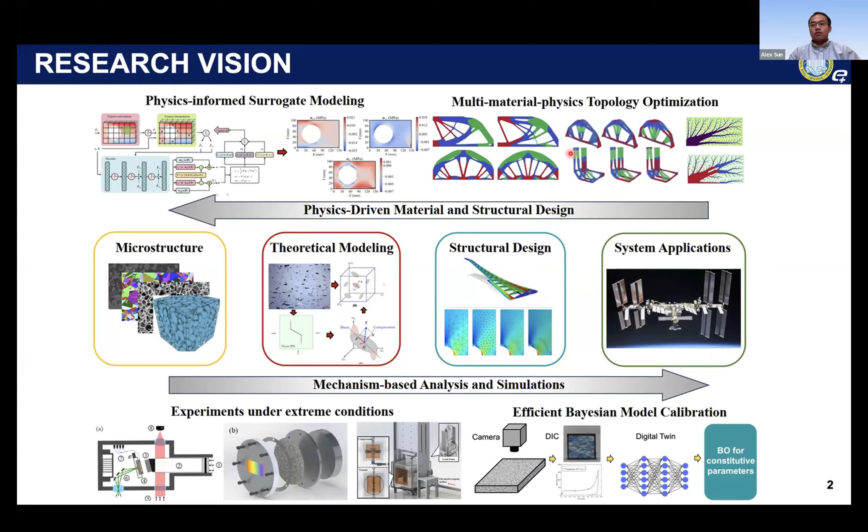Our Gaussian process uses a neural network as the mean function, which is very powerful to model quite complex stress localizations, for example. Furthermore, I will extend this compliance minimization framework to more advanced topics such as multi-material and multi-physics topology optimization.

In that extended framework, we will handle both the self-adjoint problem and the non-self-adjoint problem. Finally, I will demonstrate our capability using a multi-physics example, such as thermomechanical device design.

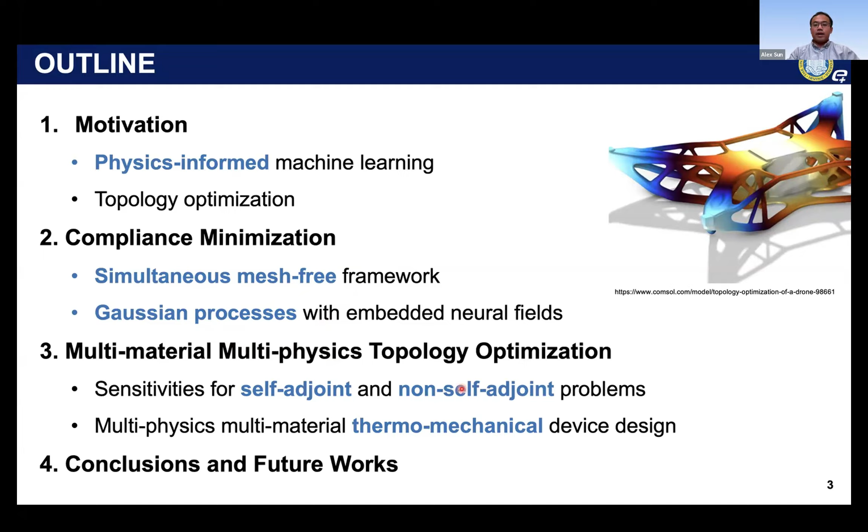Machine learning is a set of powerful tools for modeling complex systems. Depending on the availability of data, machine learning can be a data-driven approach, or it can involve no data or very little data. In that no-data case, we call it physics-informed machine learning.

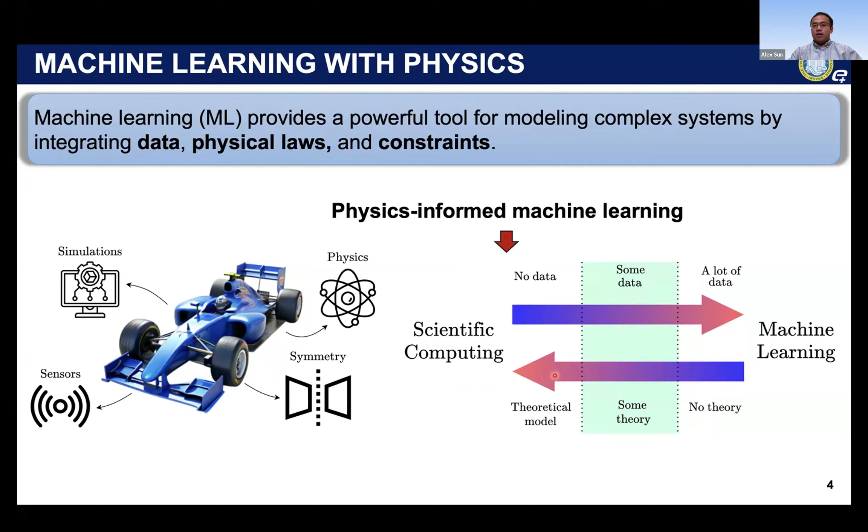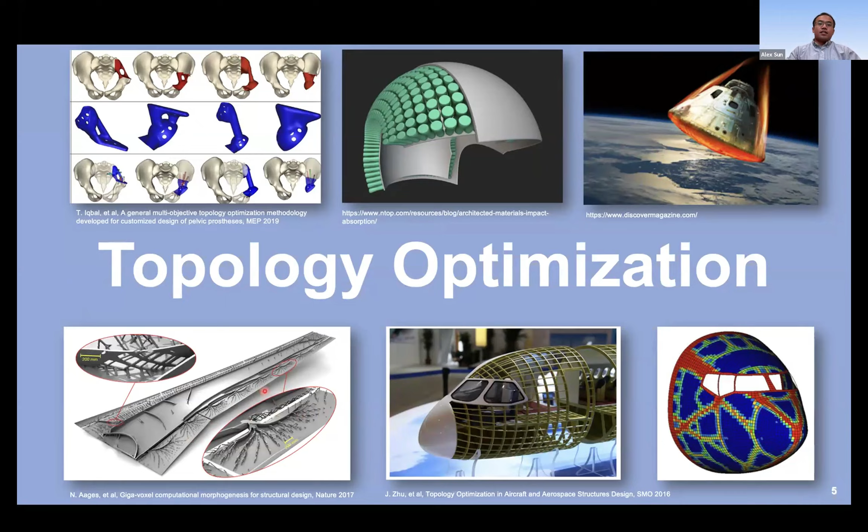It's just like a scientific computing technique, such as the finite element method, where we can model a complex physics system or get solutions to complex governing PDEs. Topology optimization is a good topic at the intersection of computational mechanics, machine learning, and design. It draws significant attention in engineering design applications, such as aircraft design and helmet design for protection purposes. Topology optimization is a method to determine material distribution by minimizing specific objective functions.

So those optimizations are under the constraint by several physics, for example, by the PDE constraints and also the constraints from the volume fraction. Classic methods such as solid isotropic material with penalization has been pretty much well developed, right?

So this simple method uses a design variable of the density, ranging from 0 and 1, with 0 corresponding to the void and 1 corresponding to the solid.

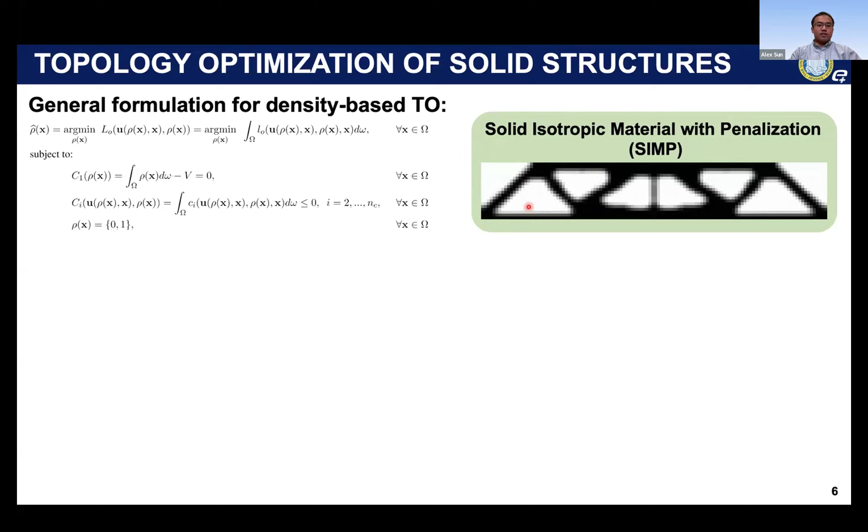This method has been very well developed in recent years, and there are some advanced topics around multi-scale, multi-material, and multi-physics. Most recently, people use nonlinear material constitutive response, such as plasticity, to do topology optimizations.

However, there are very limited amounts of work that explore machine learning's application in these advanced topics. Today, I will be focusing on multi-material and multi-physics as the advanced TO problems.

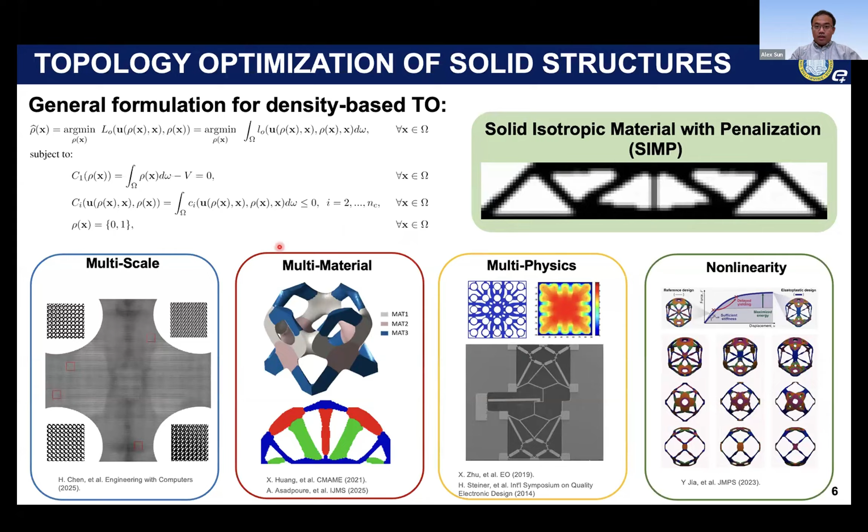However, machine learning has already been quite used in the topology optimization regime. So this work presents a supervised approach, where they train a neural network to predict the sensitivity map. This supervised approach can accelerate the compliance minimization by 11 times for very large scale problems, like 10.6 million elements.

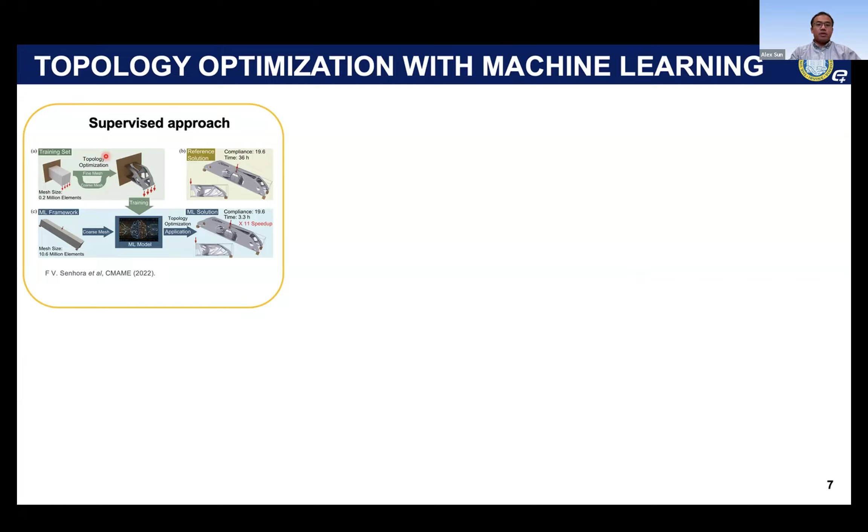So if we do not have data, we can use physics-informed machine learning for topology optimization. Those four papers combine physics-informed machine learning with finite elements, and also combine machine learning with a deep energy method to do TO.

However, all those approaches have a similar algorithm structure where for each density update, you have to solve for the displacement, or solve for the solution variable. We call this a nested structure, and it can cause pretty high computational costs, especially using machine learning or physics-informed machine learning solvers to get the solution variables.

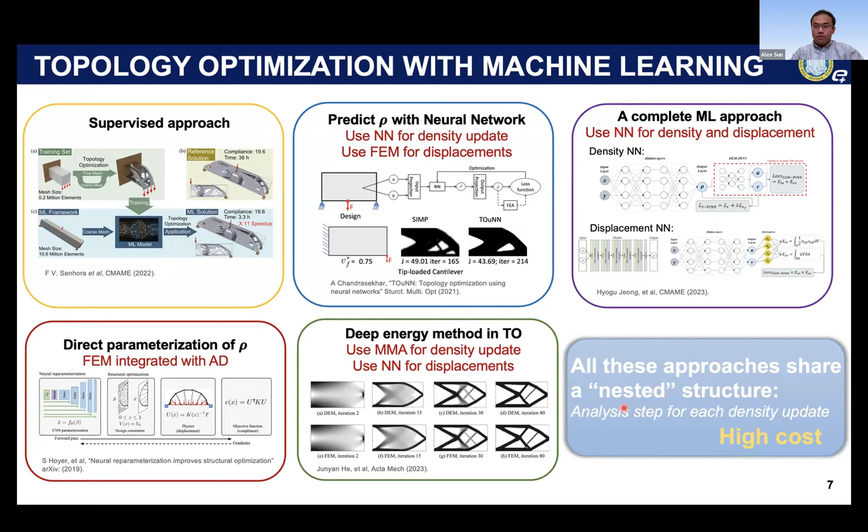So as I just mentioned, the existing machine learning methods for TO have many issues. It can be very expensive to compute, and it has very slow convergence to satisfy balance conditions. Also, at the beginning of the training, the accuracy is pretty low.

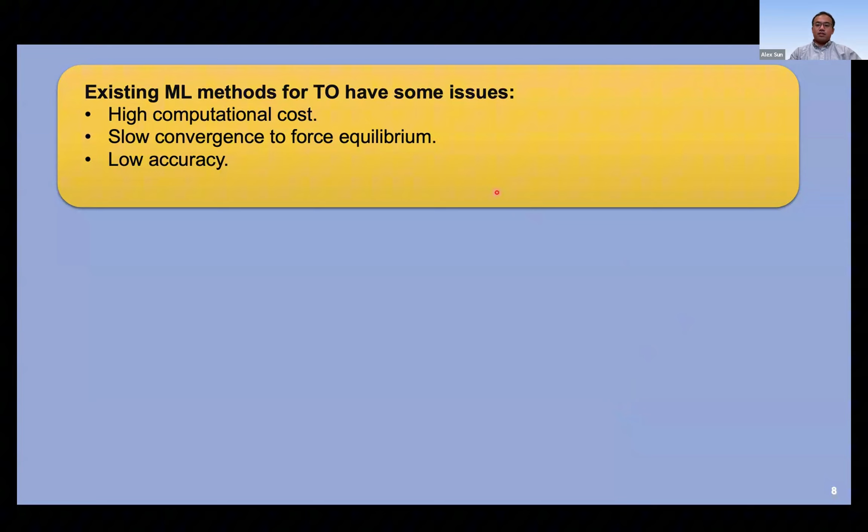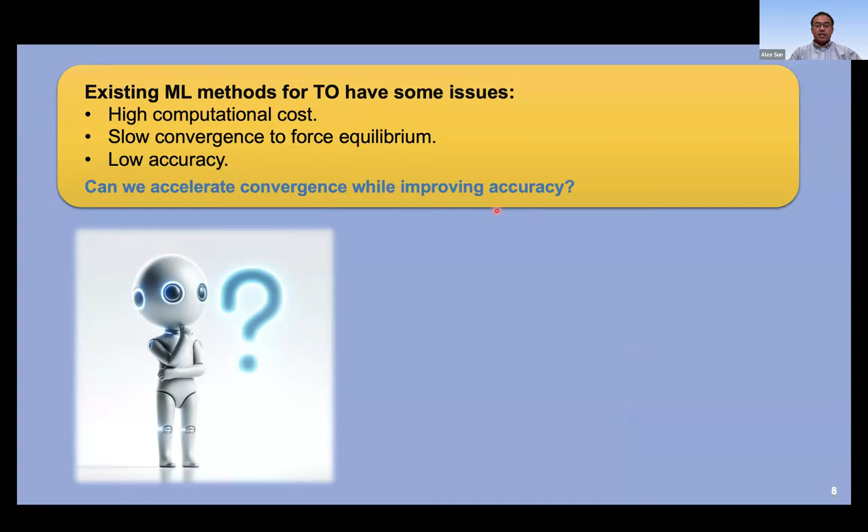Because we are minimizing the residual of our PDE system, and also minimizing the boundary conditions, which may not be satisfied. So one question we can ask is, can we accelerate the convergence while also keeping high accuracy? Yes, the answer is yes.

And I'm going to show you how we do compliance minimization, which is the benchmark TO problem, through our framework called the physics-informed Gaussian process.

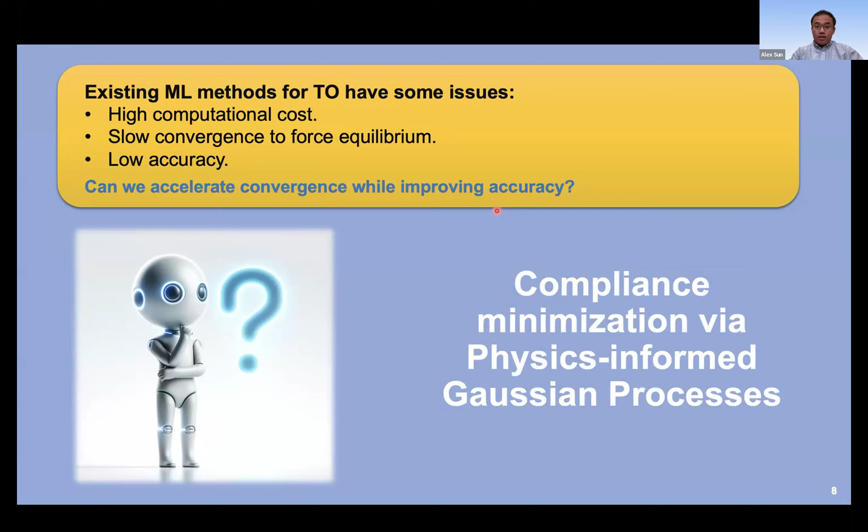This slide shows the general comparison of our approach with the classic TO approach, such as SIMP. Our approach is a simultaneous and mesh-free approach, where by simultaneous, I mean we optimize the topology, such as updating the density field, simultaneously with solving for the state variable.

Here is a comparison. For a classic SIMP method, you can see we solve for the displacement, or solve for the solutions, iteratively for each density update. What we believe is that this nested solution step is unnecessary.

What we do is for each iteration step, we keep updating the density and also the displacement simultaneously. So this is a simultaneous scheme, which is just like the continuation nature in classic TO problems.

In order to achieve the simultaneous approach, we have to parameterize our density, which is the design variable, and also the solution variable, continuously with an analytical function. That function we use is a Gaussian process for each variable, which I will talk about later.

With this continuous representation, what we can achieve is we do not really need the filter to solve checkerboard issues, and also we can achieve super resolutions. So there are many advantages to using a continuous representation of our variables.

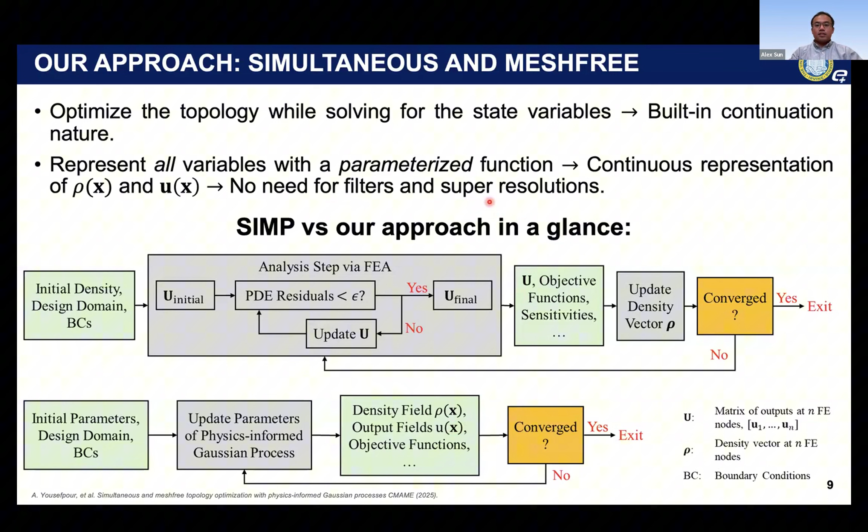Okay, so this is our overall algorithm. In order to do topology optimization, we place Gaussian process priors on all variables. The specific formulations of the Gaussian process prior will be given after these slides.

And then we can formulate the general topology optimization problem by this objective function, which is an integration of a local function. You can think about this as compliance minimization, where here L0 represents the local compliance value.

This objective function should be subject to several sets of constraints. C1 represents the volume fraction constraints. Ci represents design constraints—for example, if you want to put a hole in your design domain, it's constrained by the Ci constraint. R represents the residual constraint, where we have both the governing physics residual, the PDE residual, and also the residual from the boundary conditions.

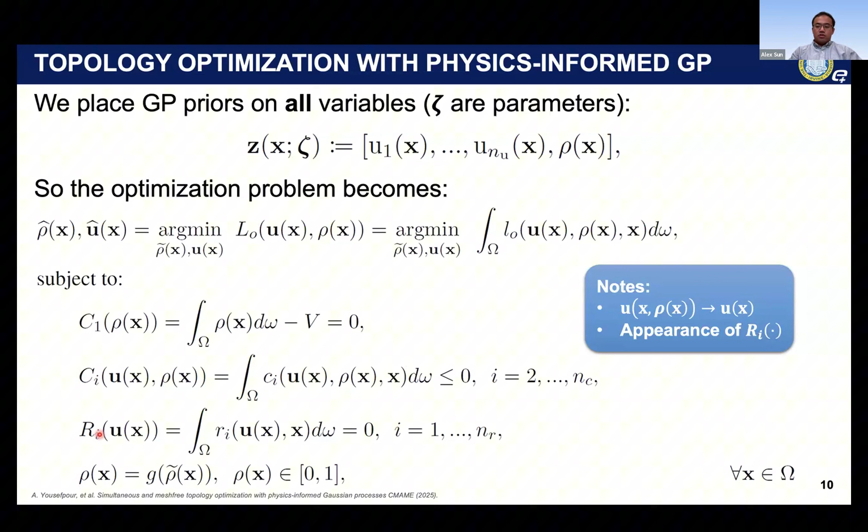So we can use a penalty method to transform the constrained optimization into unconstrained optimization by introducing these weight factors. With this continuous representation and unconstrained optimization, we can solve this problem by estimating the parameters to minimize this total objective function.

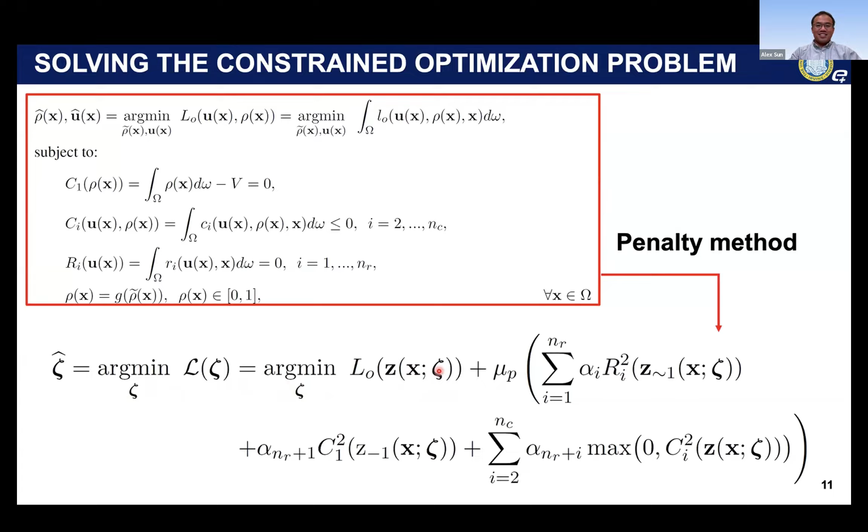As I mentioned earlier, we place the GP priors on all the solution and design variables. So why do we really need the GP priors? Well, the GP can provide a very powerful and probabilistic way for data emulation and also for function learning.

For data emulation, GP leverages the data from the field. For example, if we want to learn the function of the displacement, it's a continuous function. The data for that function is boundary conditions around points close to the boundary where we know the values. For example, if we fix a point on one of the edges, the displacement will be 0.

Then we assume Gaussian priors on this, we place the Gaussian prior on the displacement function, where it has a mean function m and also a covariance function. Both the mean and covariance have their own parameters, theta and phi. The covariance function we adopt here is Gaussian type, where this exponential function captures the correlation between two points in the design domain, and this correlation is regularized by a length scale parameter phi. We also introduce this nugget parameter as an actual term to stabilize the training of the Gaussian process.

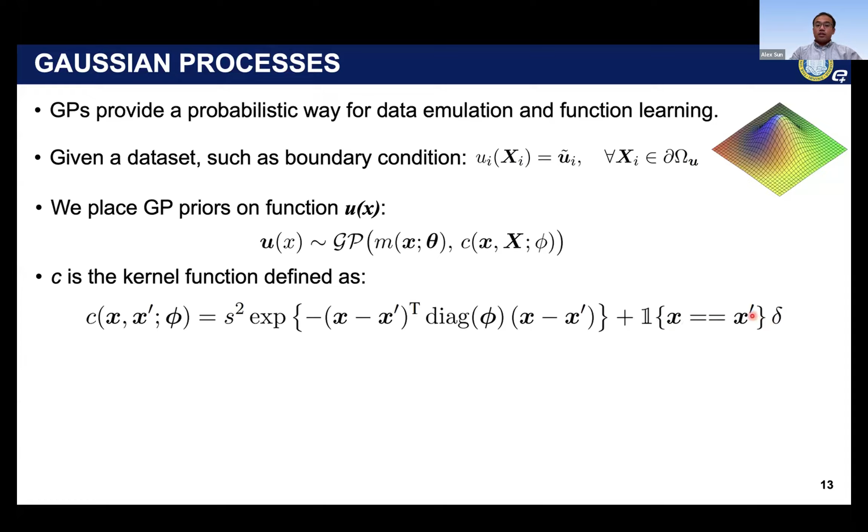Now that we have defined our Gaussian process, we can estimate our function values at any given point in the design domain using these prediction formulations. Here we want to predict the displacement field, the ith displacement component at point x star, equal to the mean function plus a correction term. The correction term contains two components: V, a weight matrix which contains the inverse of the covariance matrix, and R, the residual term.

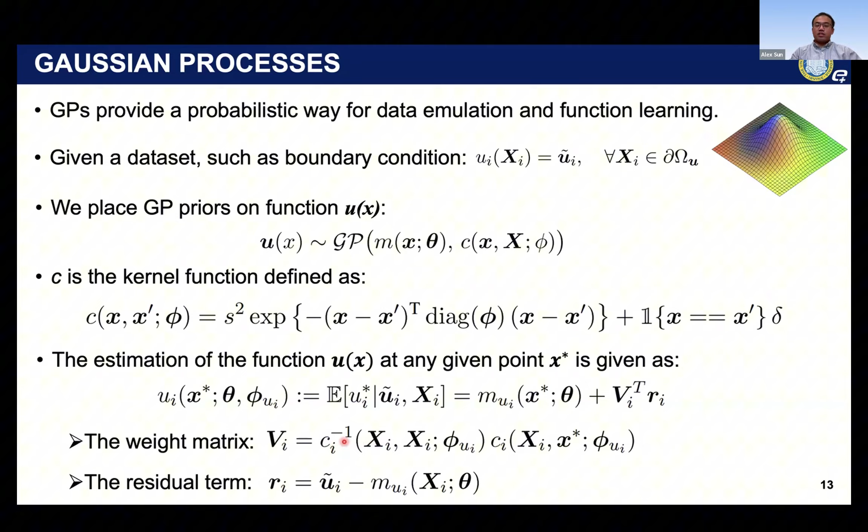You can easily verify that by choosing x star equal to the boundary point x, the prediction reproduces the boundary condition data. This reproducibility is very useful to capture boundary conditions without using residual terms in our physics-informed machine learning framework. We also introduce the nugget parameter so that when we invert the covariance matrix, invertibility is always satisfied and the matrix is always positive definite.

Now we have defined the Gaussian process. We've only described the covariance function, but for the mean function, what we use is a neural network. We place a neural network, such as a multi-layer perceptron, as the mean function.

Then we can further construct our physics-informed loss based on the PDE system, and update the parameters in the neural network to minimize this PDE loss so that we satisfy the physics. Our approach is mesh-free because we use collocation points in the design domain as input to the neural network, and output the solution variables at those collocation points.

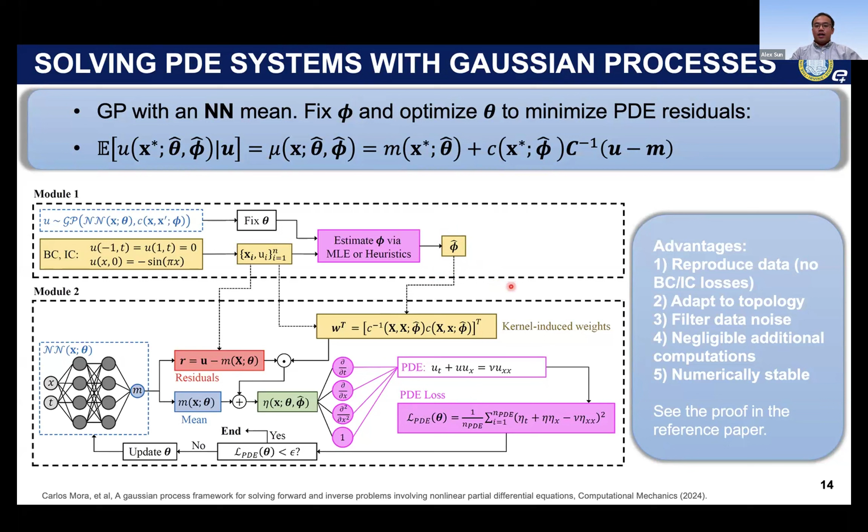During training of our neural network, we do not change the kernel parameter phi, because we already fix and choose that parameter before training. This significantly increases computational stability and decreases computational cost. This choice does not influence the accuracy of the PDE solutions from this method. If you're interested, you can read our paper for more details.

I'm going to show you the capability of this physics-informed Gaussian process by solving three different PDEs: Burger's equation, an elliptic equation, and another type of PDE system. We compare our framework with conventional PINN, and found that the absolute error is much smaller than the traditional physics-informed neural network, so it's much better in terms of accuracy. The reason is that we don't have a residual term for boundary conditions—all we focus on is minimizing the PDE residual, so it can be quite efficient.

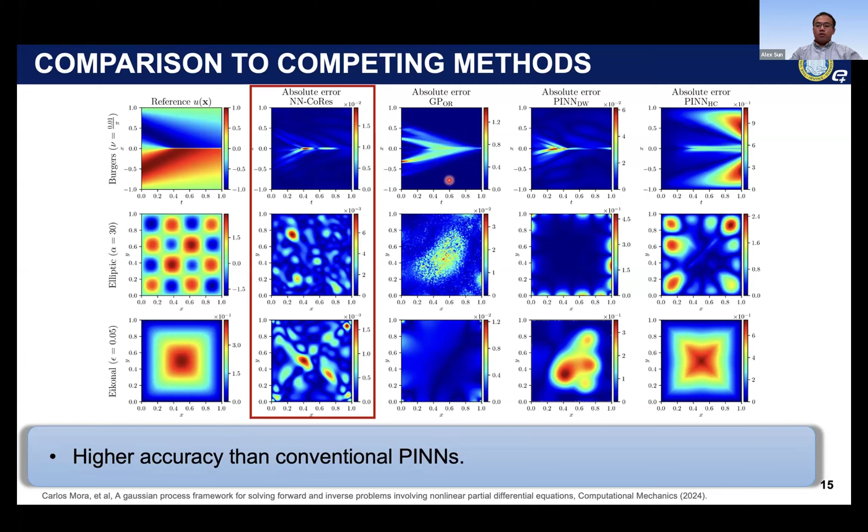Now we can solve the PDEs, and what we want is to really use this physics-informed Gaussian process to do topology optimization. However, a multi-layer perceptron neural network cannot really do the job because it has issues such as spectral bias, where it cannot capture high gradients in our solutions.

To better parameterize the mean functions, what we choose is PGCAN as our mean function. PGCAN has 3 major components: feature convolution based on the 2D convolution neural network, where we define a feature space in the design domain. The feature space has a parameter called the res parameter, which quantifies the resolution of the grid in the design domain.

We can adapt the res parameter to adapt the topologies, which I will show you later. After the convolution, we interpolate the convolved feature onto the interpolation point, or collocation point, to estimate our loss functions. This interpolated feature will pass through the decoder to get the output of the mean function.

Similarly, we condition this output of the mean function with GP formulation to get actual physical terms, such as displacement and design variable. Based on those actual physics displacement and design variable, we can construct our physics-informed loss.

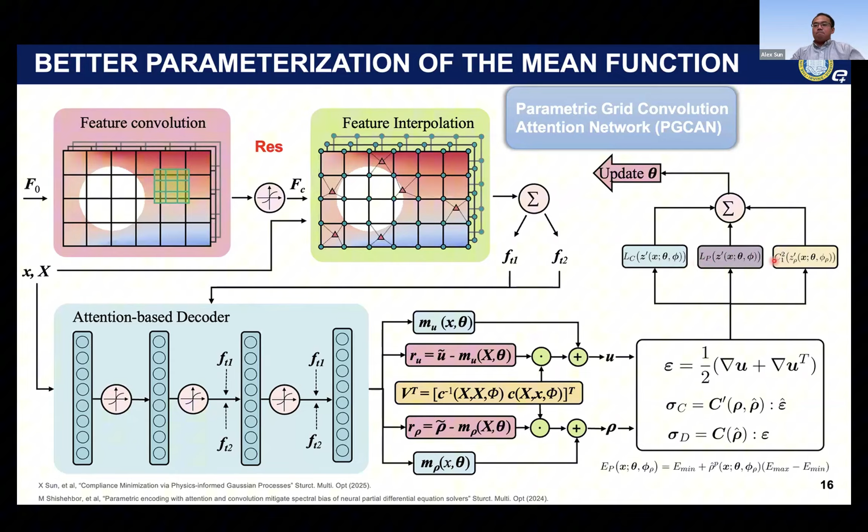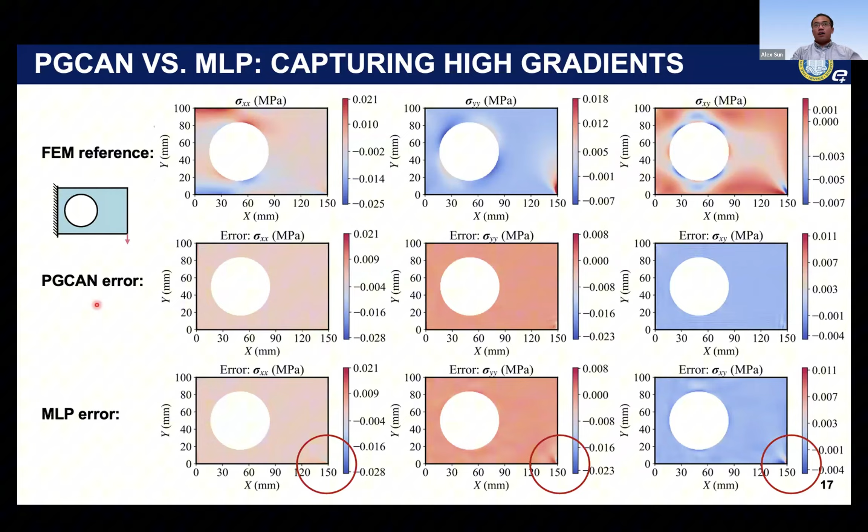In literature, people use modified neural networks such as Siren to achieve similar results, but I believe our PGCAN method is much better. We can get this convergence done in about 200 or 300 iterations.

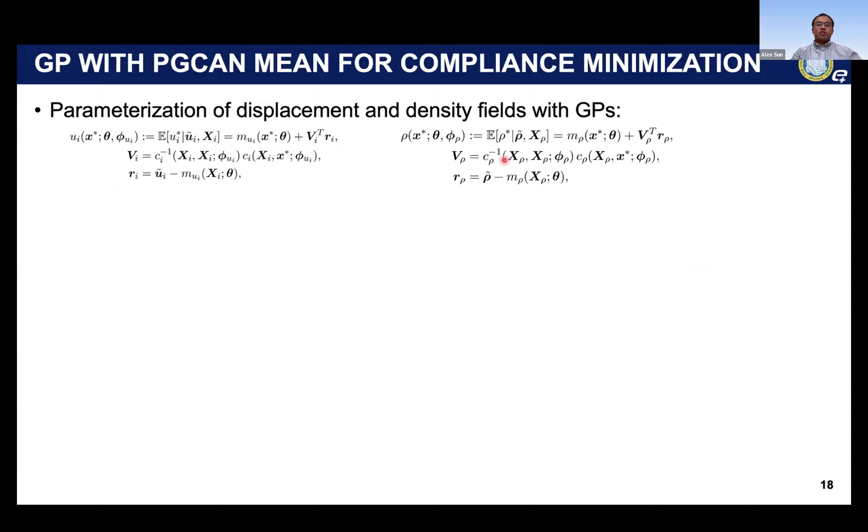Here's the summary of my framework, where we place the GP priors for both the displacement and the density. Those are the formulations. We have independent GPs for each variable, so that we can make sure our computational cost is low with independent GP. And we have three different loss components.

We use a penalty method to transform the constrained optimization into unconstrained ones. What we do is just optimize the parameters for the neural network to minimize this objective function so that we can solve this TO problem.

In order to effectively and efficiently estimate the loss function, we can use automatic differentiation method to get the gradient, because we have the stress and strain in our loss functions, which is a gradient of the displacement. However, automatic differentiation can be very expensive.

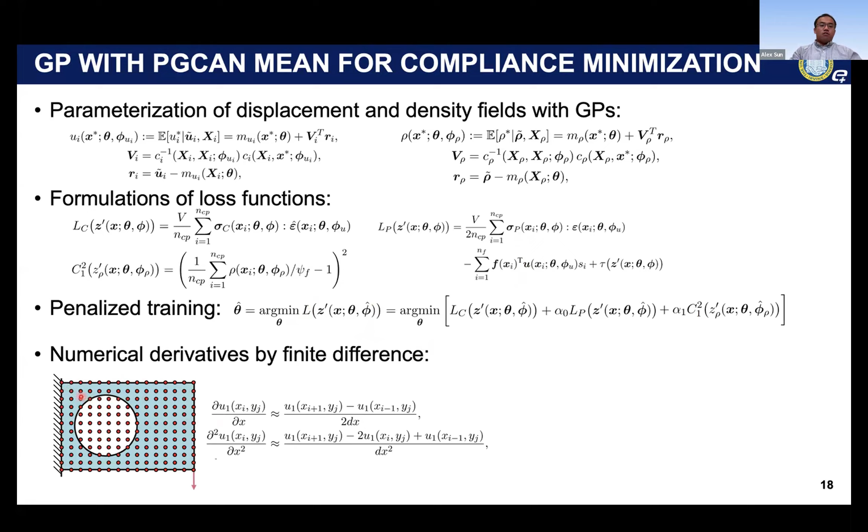What we use here is a finite difference method, where we place a structured grid of collocation points in the design domain, and the numerical gradient can be easily estimated.

Also, to further stabilize our training process, we designed a curriculum training scheme where instead of directly targeting a very low volume fraction target, we gradually schedule our learning from a high volume fraction down to the target value. This significantly improves the stability of our training.

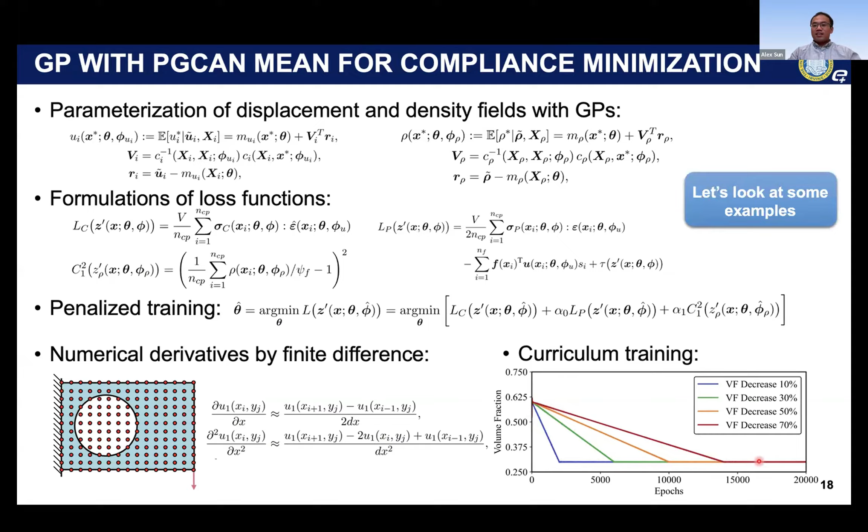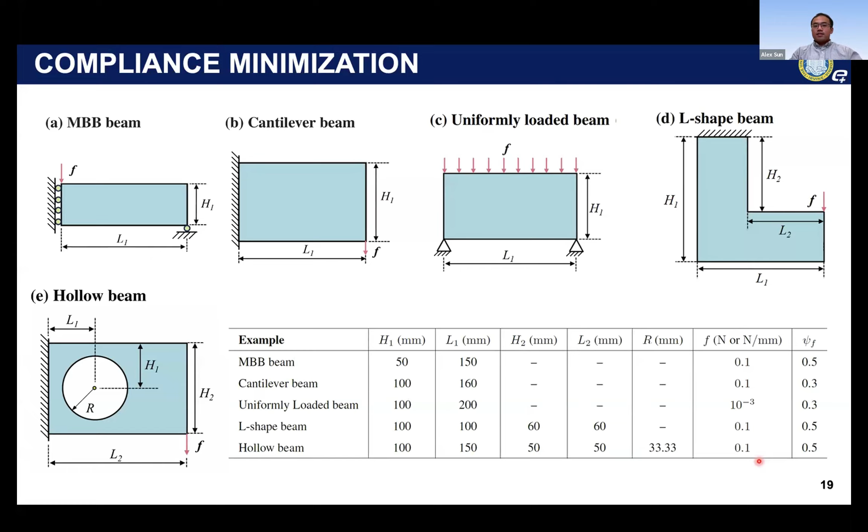Now that I've introduced the framework, let's look at some examples. I will use 5 different benchmark examples. These examples are widely available, and you can see them everywhere in educational papers for TO.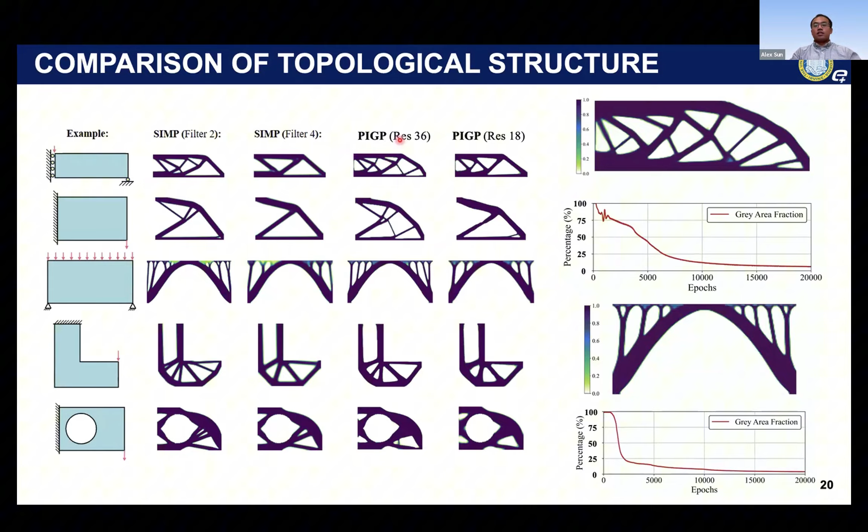So what does the complexity mean? The complexity we defined here is how much features in the design domain. For example, in this MBB example, the green pixel represents the interface between the solid and the void. So we define the complexity as a ratio of the green pixel over the solid pixel. The higher the ratio, the more complex the structure.

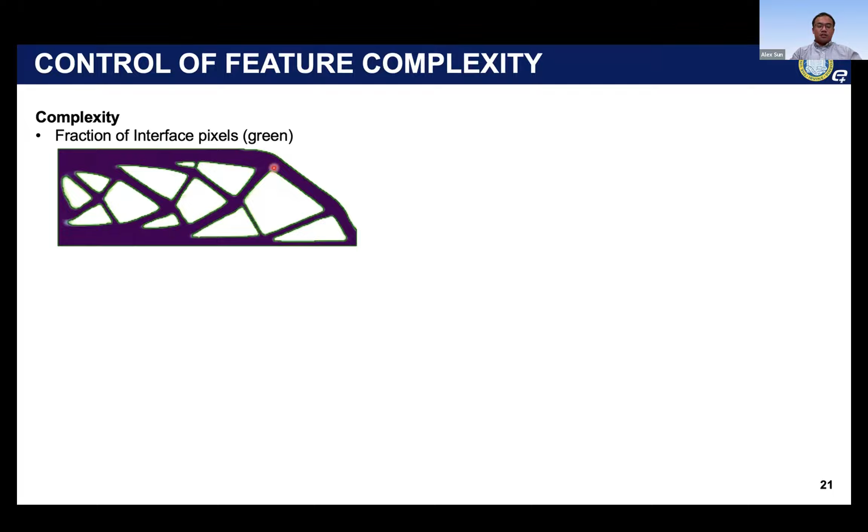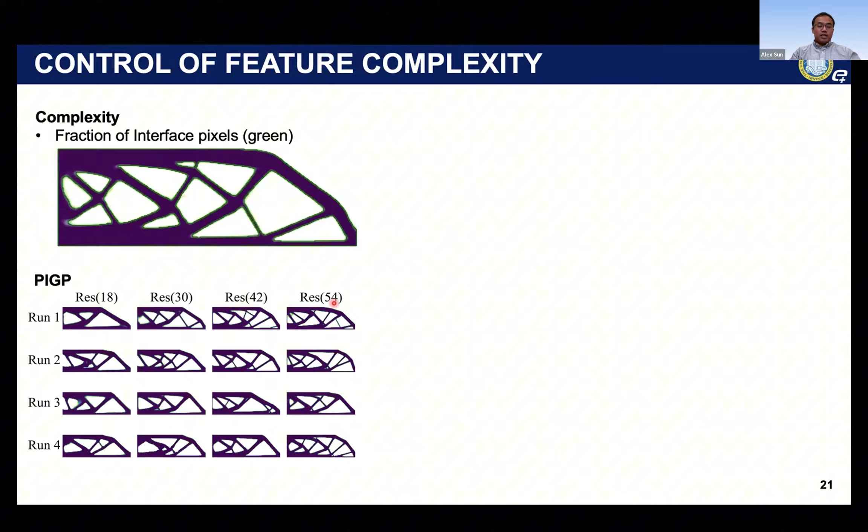This figure shows our approach where we can increase the Res parameter from 18 to 54. The Res parameter defines the resolution of our PGCAN grid. By increasing the Res parameter, we can increase the complexity, which is also represented by this statistical curve, static bar plots. However, you can also see from the plot that our approach has a pretty wide distribution of this complexity metric.

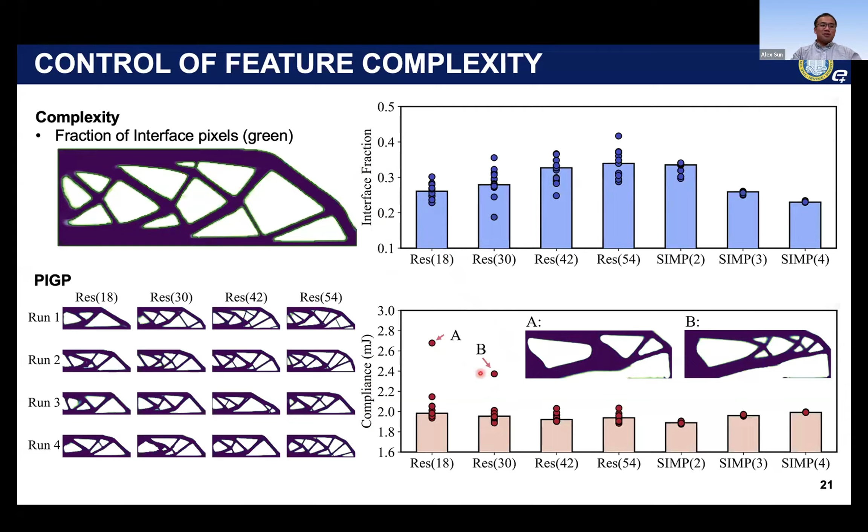This is because even with a curriculum training schedule, we still get some instability happening during our training for some initializations. We repeat our simulations or training for 10 different initializations, and for several of them, we see these outliers on the compliance as well as some outliers in the interface fraction. Those outlier cases correspond to less preferable design structures, with very high objective functions. This is due to the instabilities, and we will solve this issue later using the shape functions, which I will mention in the next slide.

We can also compare the topologies from using the MLP as a mean function versus the PGCAN as a mean function. You can see the PGCAN can be very effective in removing the gray area and getting nice structure binary distributions.

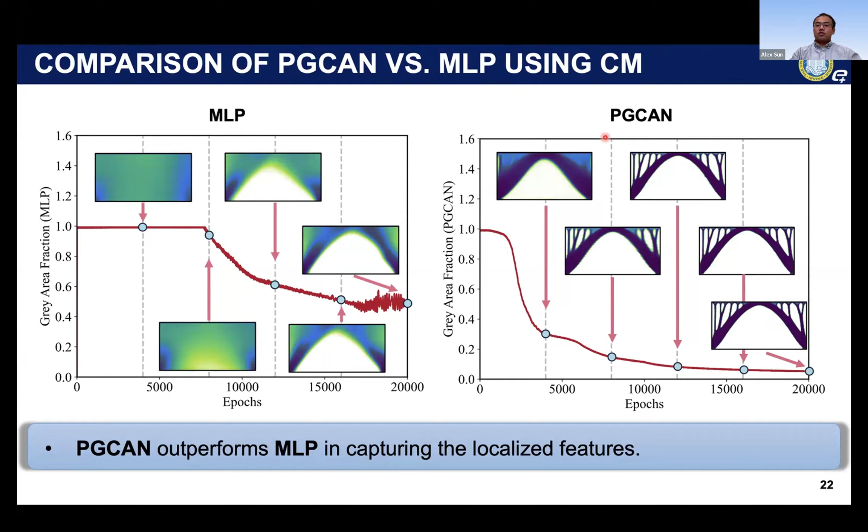We can also use our physics-informed Gaussian process approach for fluid flow optimization. Here we are trying to minimize the energy dissipation by defining this function in the fluid field. We compared our framework results with traditional solvers such as COMSOL, and we found that our framework can be more consistent and more symmetric in getting the topologies than the COMSOL approach.

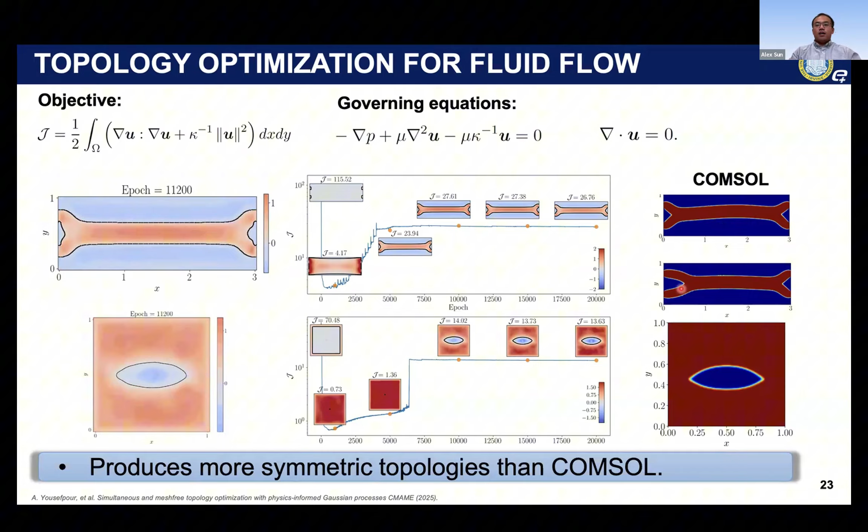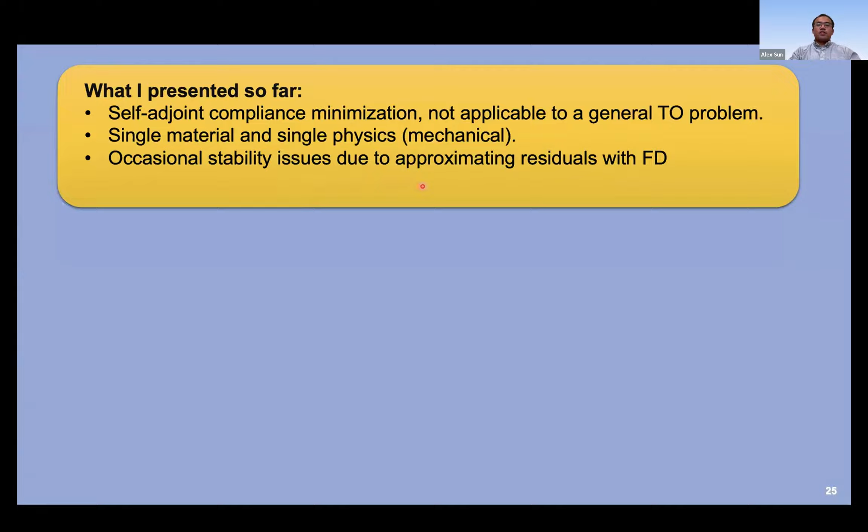So now I have presented the compliance minimization. The compliance minimization is a very simple TO problem for single material and single physics. Single physics, I mean, is just a mechanical field. And it has some stability issues, as I just showed you before, that some less preferable configurations show up, probably due to the finite difference method. So one question we can ask is: can we really extend this framework to more advanced TO problems?

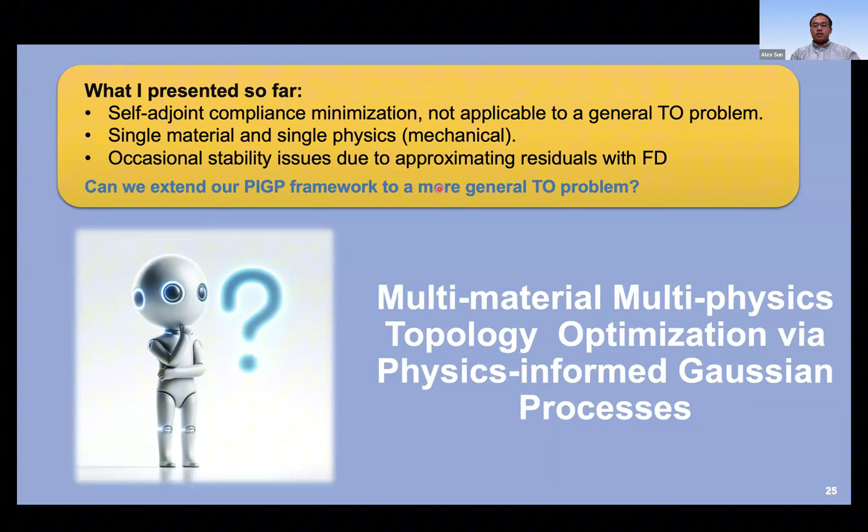Yes. And I will talk about more advanced topics, such as multi-material and multi-physics topology optimization, still using our framework, but with some modifications. First, we want to formulate our multi-physics and multi-material problem.

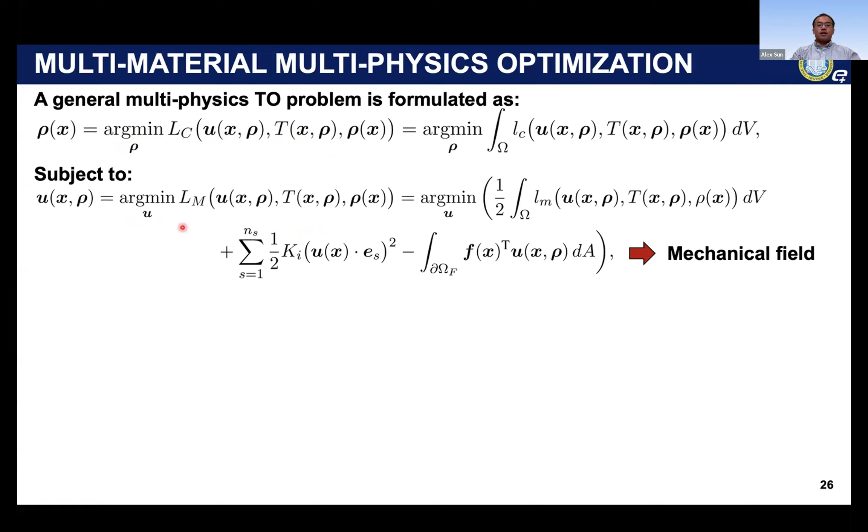Here, we want to use a thermomechanical problem as an example, where our objective function depends on the displacement field, which is a mechanical field, and the temperature as another physics. Then we have the design variable as a density. This objective is subject to several constraints, such as the constraint from the mechanics, which we have to minimize the potential energy of the displacement field, and also we have to minimize the potential energy for the temperature field to get the correct temperature distributions.

Also, our design constraint should satisfy the mass constraint or the cost constraint, similar to the volume fraction constraint in the compliance minimization. For multi-material optimization, the design variable density is not a scalar, it becomes a vector with several components. So rho zero corresponds to the void phase, and rho 1, 2, 3, 4 correspond to different candidate materials.

Also, just like the SIMP method, we penalize our properties such as Young's modulus, conductivity, thermal expansion, and thermal source using this density field. One thing I want to highlight is the two design variables here in the thermomechanical problem: we have U depends on rho, and also temperature also depends on rho. Those dependencies are implicit, so we have to capture this implicit dependency in our sensitivity analysis.

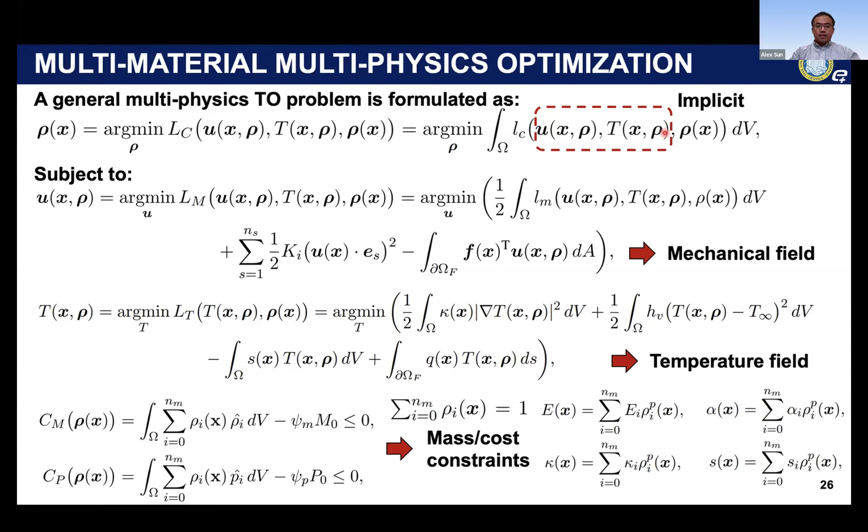To do the sensitivity analysis, basically we have to calculate the gradient of our objective function with respect to the design variables. So we use the adjoint method, where we augment this objective function using adjoint displacement and also adjoint temperature field with their corresponding physics. By taking the gradients of the augmented objective function with respect to the density, we can then organize the terms to eliminate some unknown gradients, such as the gradient of U with respect to rho and the gradient of T with respect to rho.

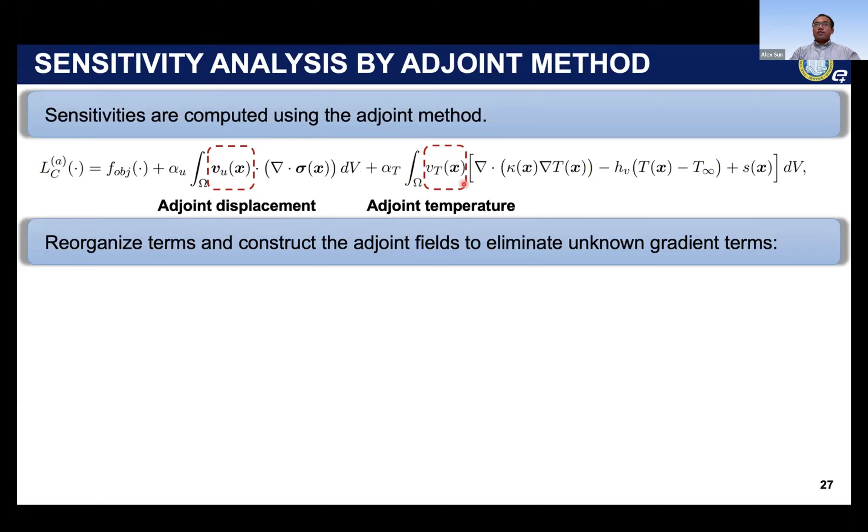We can get sensitivity formulations for different types of problems. As I just presented before, for compliance minimization, it's self-adjoint, where we do not need to solve for the adjoint displacement fields in order to get the correct sensitivity expressions.

Similarly, for the heat sink optimization, we also do not really need to solve for the adjoint temperature field.

For non-self-adjoint problems, such as compliant mechanism design, the sensitivity expression is given here with both the mechanical and the thermal adjoint field. So those are quite different, complex sensitivity expressions.

In order to estimate the adjoint displacement and adjoint temperature field, we have to simultaneously solve these two sets of partial differential equations. If you are interested, I will not show my detailed derivation here, but you can...

look at our paper coming out soon about this problem. So to summarize, in order to do multiphysics and non-self-adjoint topology optimization problems, we have to solve independently the adjoint field by constructing these physical PDEs.

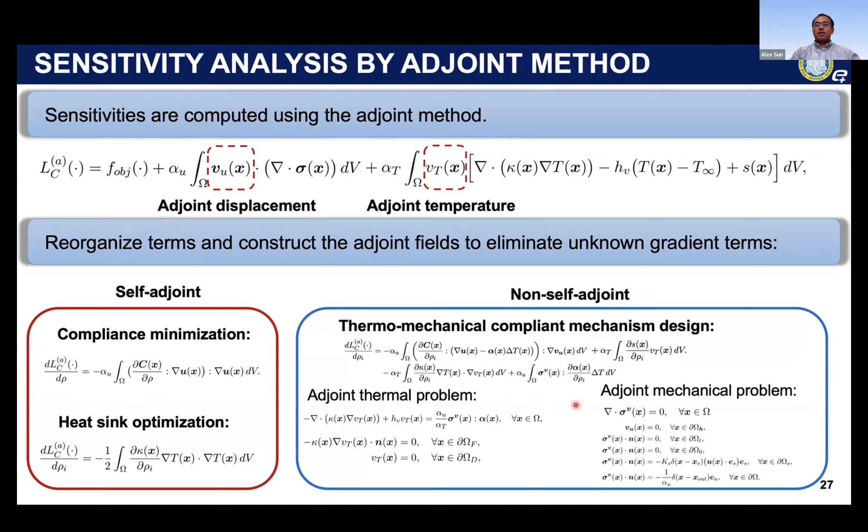Now here is our extended model. We continue to use PGCAN as our mean function for the Gaussian process because PGCAN is really good at capturing localization features. We have PGCAN for the primary field, such as displacement and temperature, and also PGCAN for

the adjoint field for displacement and temperature, and also a dedicated PGCAN network for the design variable. Here we have more physically informed losses constructed from the conditioned

outputs from the GP that automatically satisfy boundary conditions. By these physically informed losses, we can learn the parameters for each PGCAN so that we can get the correct design of our topologies.

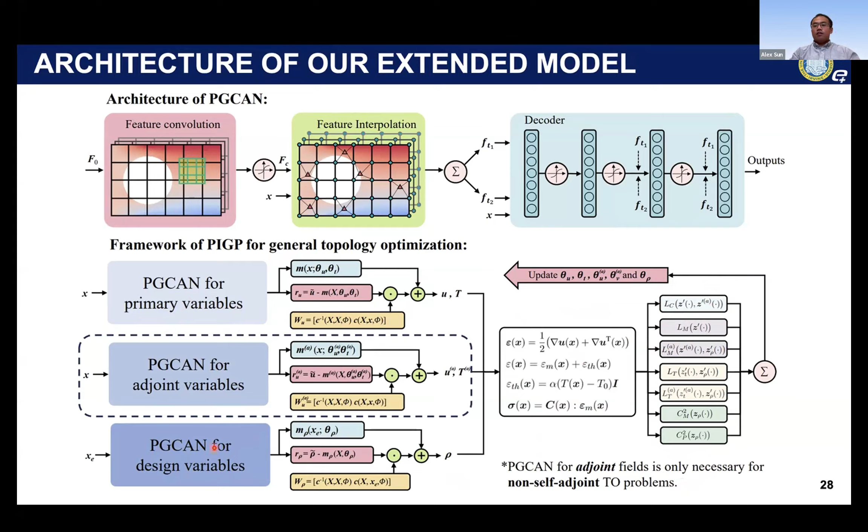Here is a summary of our extended formulations. We have 5 independent GPs, one for each variable to be solved, and each independent GP will

correspond to a specific set of partial differential equations, except for the density field, where we use the GP for density to make the prediction of our topologies. Similarly, we penalize all these physically informed loss functions, converting a constrained

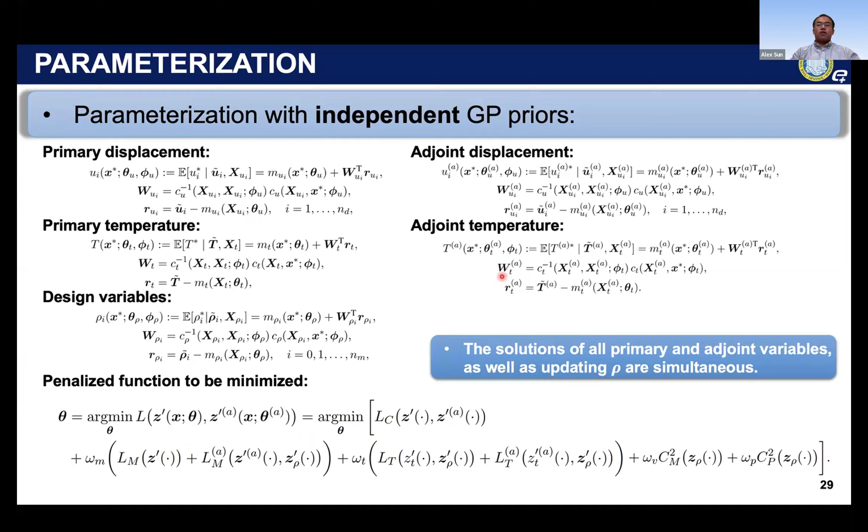problem into an unconstrained optimization using these penalization method equations. I want to also mention that the solution of all the primary and adjoint variables, as well as density updates, are all simultaneous because we define the GP as a continuous function for all these quantities.

As I just mentioned earlier, finite difference may not be accurate because it's only first order and it has some error at the boundaries.

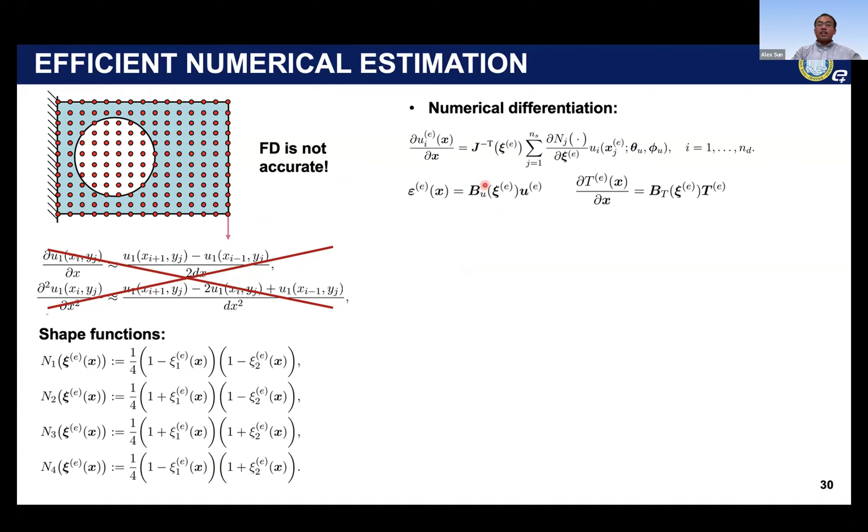from a finite element mesh. Then we can use numerical differentiation techniques, such as defining the B matrix, or the gradient matrix, for estimating the strain, and also the gradient matrix to estimate the gradient of temperature.

Then we can further use the Gaussian integration scheme from finite element integration to estimate the functional value at the integration points. Since we all do computational mechanics, those are very familiar to us.

I want to highlight that even though we use the shape function idea, we do not really have finite elements in our approach, because our approach minimizes the potential energy such that we search continuous functions,

so we search the parameters for the continuous function rather than getting just a discrete representation using finite elements. Also, during training of the neural network, we use a dynamic collocation point scheme, which means that we

train the network by varying the density of the grid in the collocation points. This will mitigate issues such as overfitting.

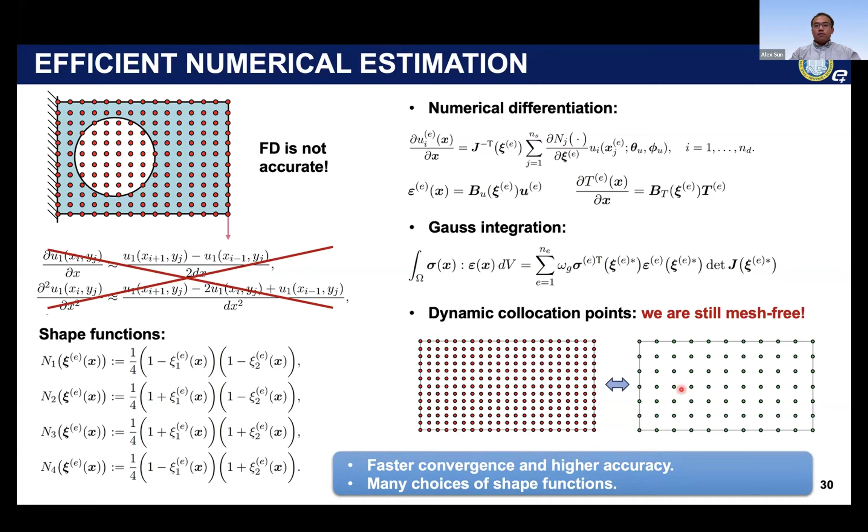This method has been demonstrated to have faster convergence, and we can leverage the whole library from finite element methods about shape functions, which can be very powerful for our topology optimization design.

To demonstrate our multi-material capabilities, we first show the results for four benchmark examples for both 2D and 3D. Those benchmark examples can also be found in the literature.

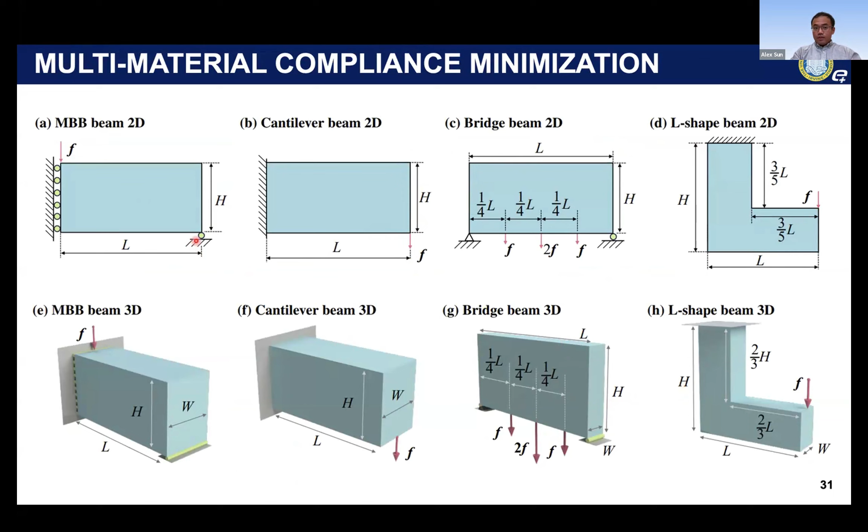We choose three different artificial materials: 1, 2, and 3. The parameters are given in this table. Material 3 has the highest density.

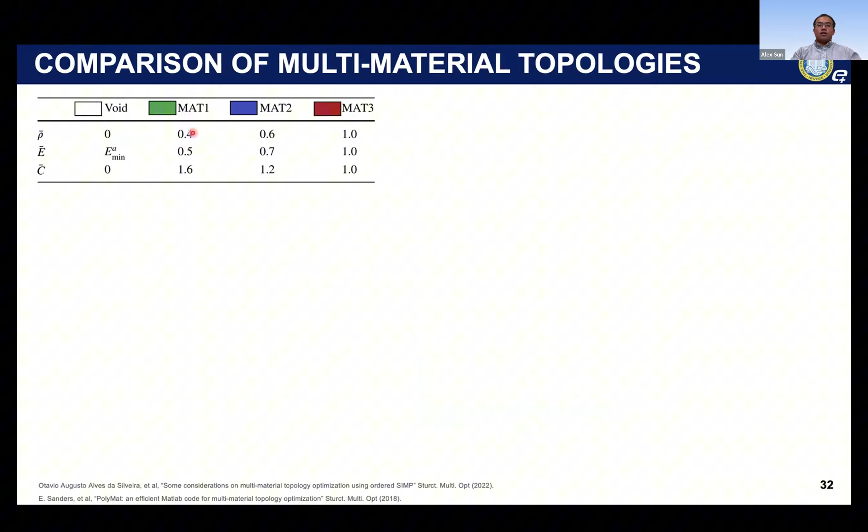Here we compare our physics-informed Gaussian process approach with approaches from the literature, such as the ordered SIMP approach and also the PolyMat approach.

Those approaches are all available online, and we apply three different constraints, such as the mass constraint, the cost constraint, and combined constraints from mass and cost.

Our approach can achieve pretty similar results compared with other established methods.

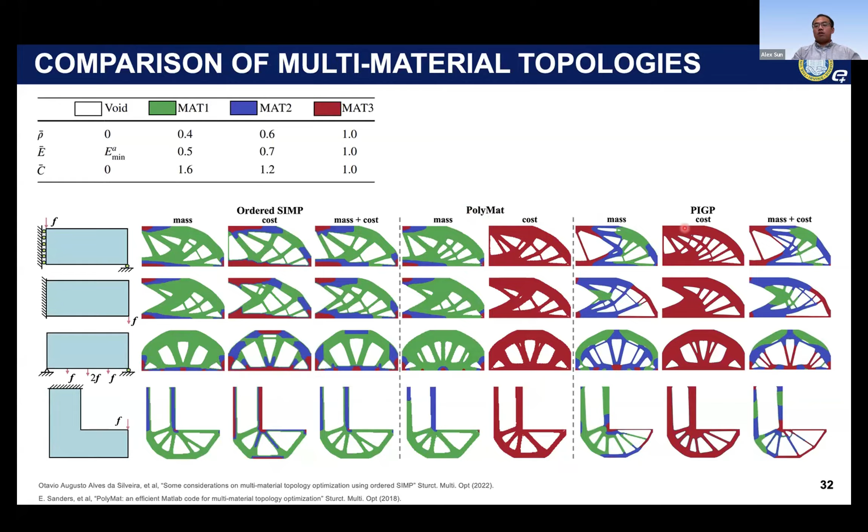However, we found that for the ordered SIMP approach, under the cost constraint, it gives incorrect results. It should be all the red material in the design domain, just like what we found using the PolyMat approach and also our approach. Our physics-informed Gaussian process can produce very sharp and also very smooth surfaces, meaning our approach can achieve super resolution compared with finite element-based methods.

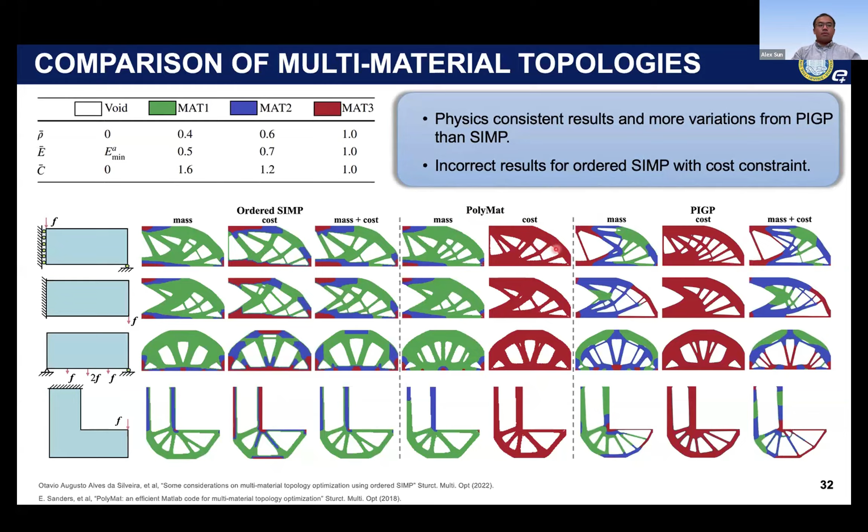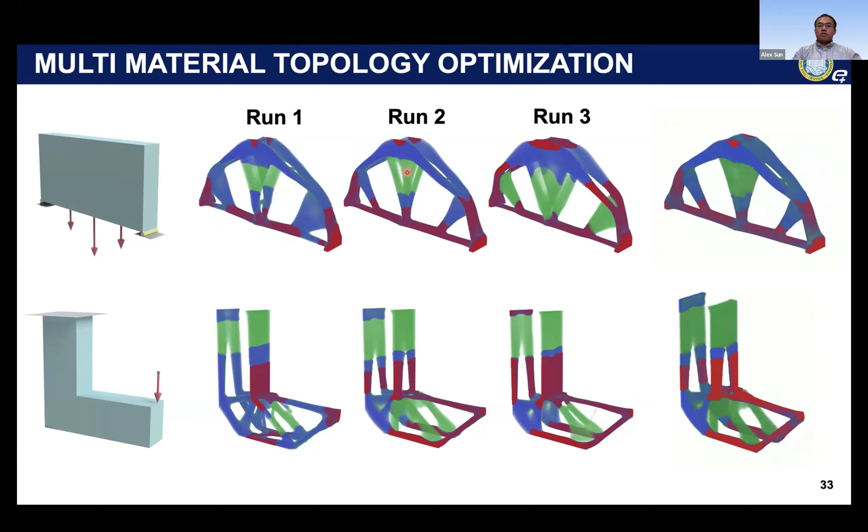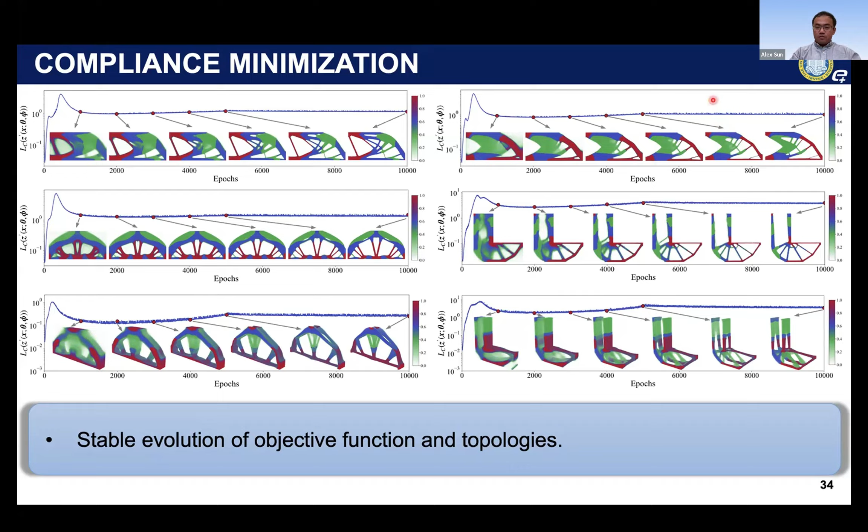I want to highlight that our approach is very easy to implement, because I just did this example in one day and got this result. So it's very easy to implement and friendly for new beginners.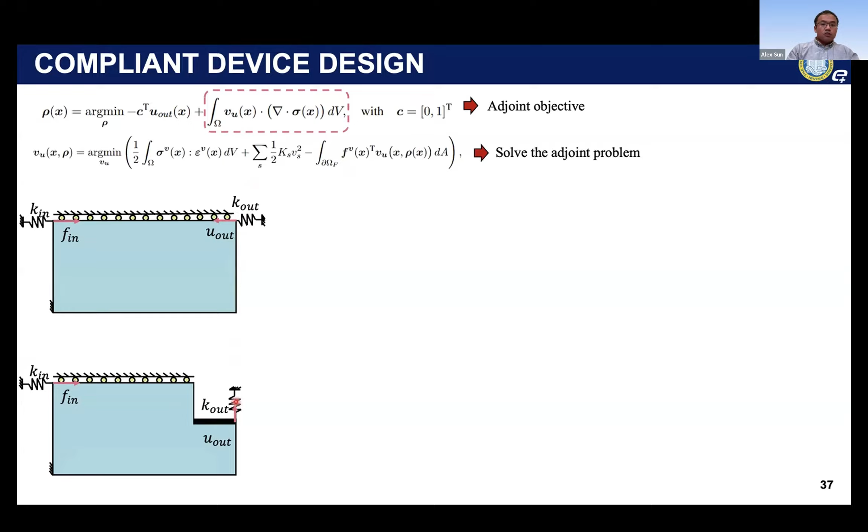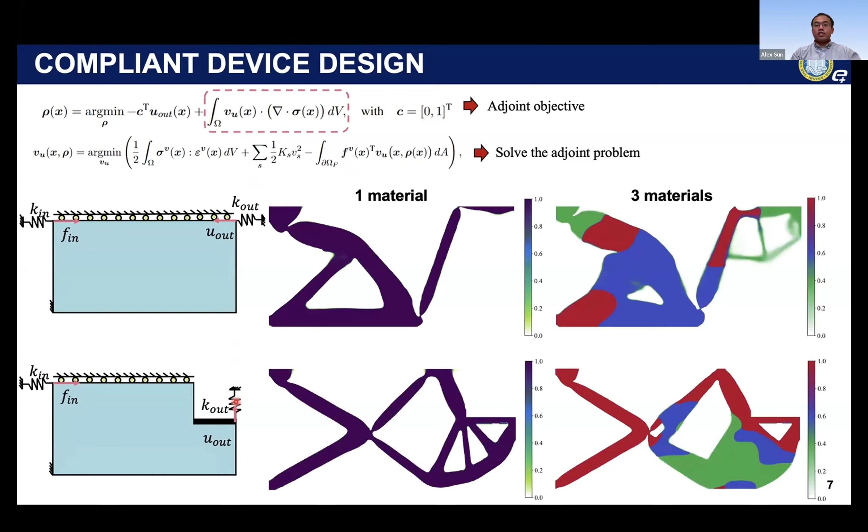So we can do both one material design and three material design. Our structure is very smooth and continuous with a very sharp interface and smooth surface, which is quite consistent and comparable to what we can achieve from the literature using finite element methods.

Finally, I will show you the thermomechanical design problem where I use the thermal actuator and the thermal gripper as examples. This is a schematic of the design domain where we apply the high temperature field on the left edge. The initial temperature in the design domain is 20 degrees C, and the high temperature on the left edge is 420 degrees C.

We are trying to maximize the output displacement on the right corner, acting as an actuator and also as a thermal-driven gripper. Based on my sensitivity analysis, this is the analytical formulation for the sensitivity where we construct our objective function based on this sensitivity expression.

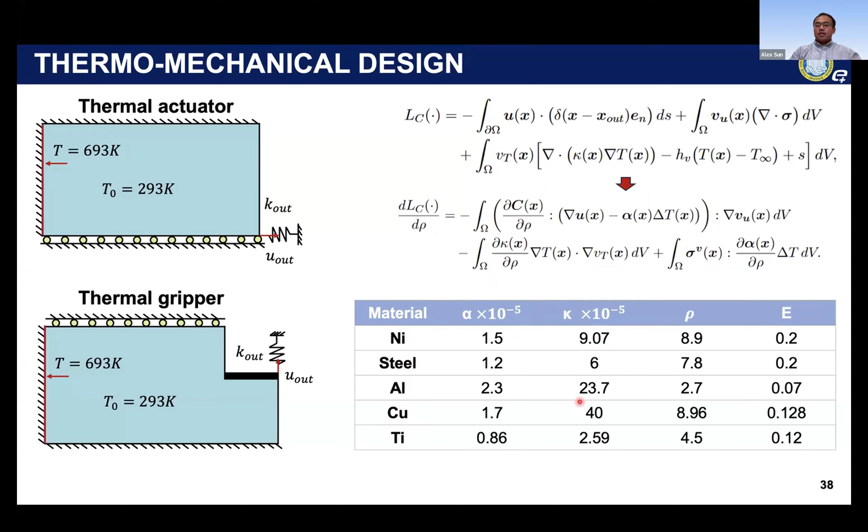We are using 5 different candidate materials from the real world: nickel, steel, aluminum, copper, and titanium, summarized here in this table. Here is the thermal gripper design, showing the topologies where we get a smooth surface and very consistent results from my simulations.

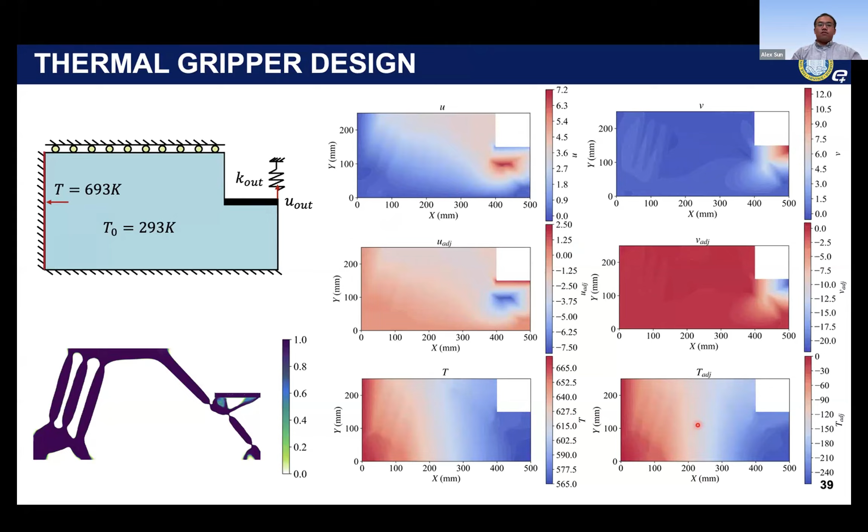Simultaneously, we solve for the displacement field and adjoint displacement field, temperature and adjoint temperature. Those 4 different fields are solved simultaneously from our framework by different PGCAN with GPs.

Now we can also compare the multi-material cases for the two examples, and I show you 3 different repetition runs. For the single material, we use nickel, and the design for the actuator is given like this—this is consistent with what we have in the literature based on finite elements.

We also have a 3 material design where the green material is aluminum. The aluminum is more preferable here for both the actuator and the gripper because it has lower density compared with copper and steel, and also has a pretty high thermal expansion coefficient.

If we replace aluminum with titanium, the titanium has very low thermal expansion coefficient and higher density, so in that case the solution does not prefer titanium—it just chooses copper and steel. Similarly for the gripper design, this tells us our approach is physically interpretable: how we choose the material depends on the physical properties of the materials.

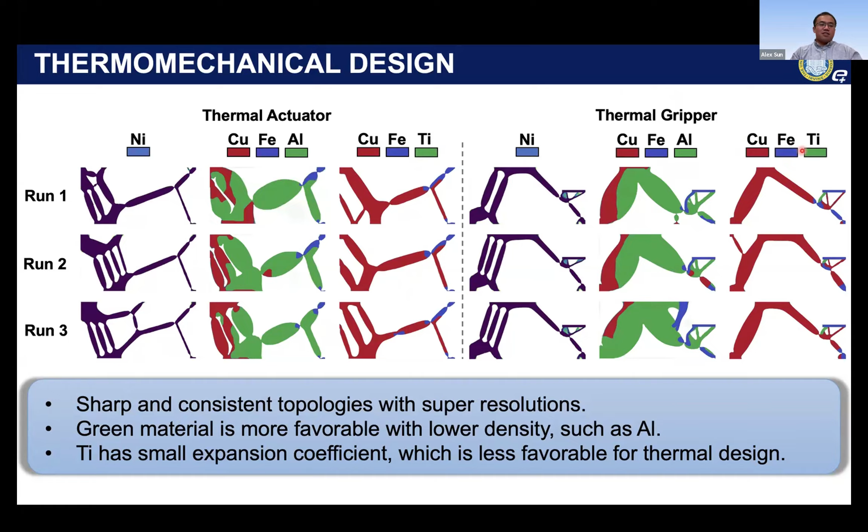And finally, yes, I will present the preliminary cost analysis. We call it preliminary because there's no publicly available code that we can use to do a rigorous comparison using GPU or multiple CPUs in parallel.

This figure shows the computation time of our approach versus the traditional SIMP approach. At low resolution or finite element mesh, the SIMP method can be very efficient and takes a very short amount of time to get the optimization. However, when we increase the mesh resolution, our approach gradually outcompetes the SIMP method. We have to admit that the number of float operations is much higher using the machine learning approach compared with finite element-based approach, such as SIMP.

The majority of the time is spent on the backward pass. We have a forward pass to estimate the objective values and the backward pass to update the parameters, so most of the time is spent on the backward pass.

In the future, we hope that we can have more rigorous comparisons of GPU-accelerated SIMP method with our method. We are also hoping that our framework can be more computationally efficient for nonlinear problems such as hyperelasticity and plasticity in the constitutive models.

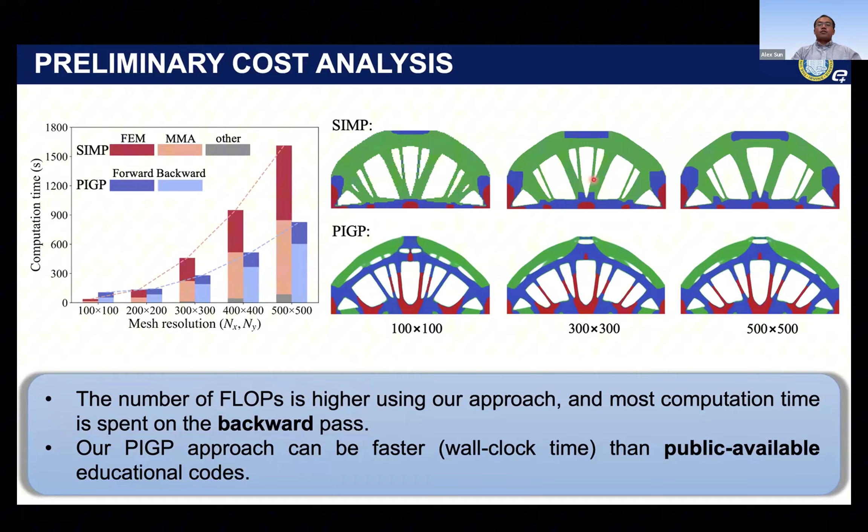Another thing I want to mention is that even without the filter in our framework, we can still get consistent results across different mesh sizes compared with SIMP, where you have to adapt the mesh filter size to the mesh size to get consistent results.

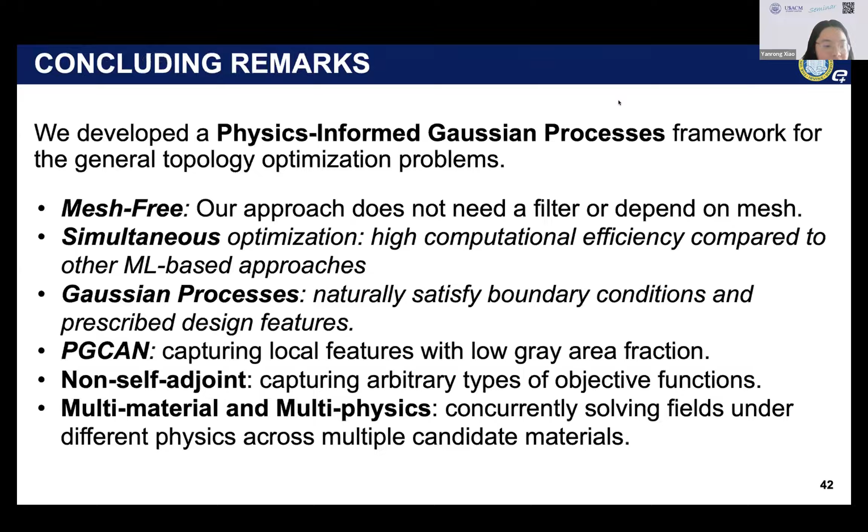For me, I have a question. I see you using the Gaussian process. Do you decide the prior randomly, or do you pick some prior by choosing particular values? And also, does that prior change itself during the calibration?

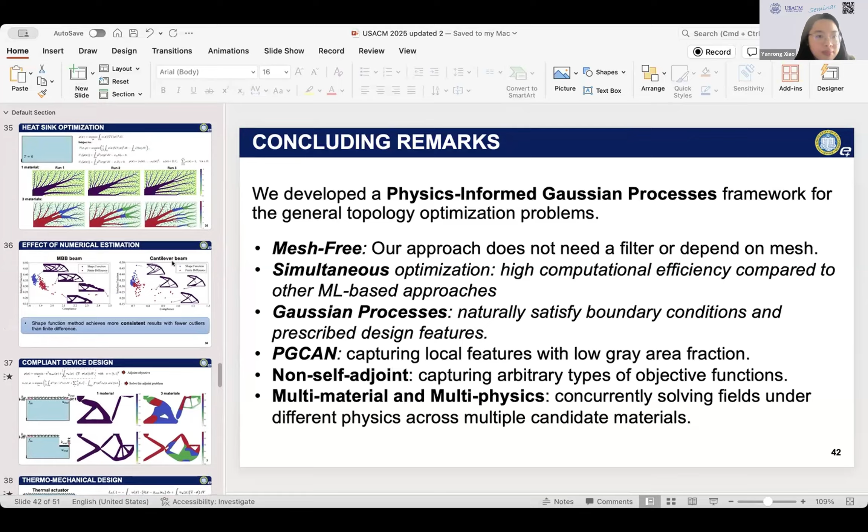You mean, sorry, I can't go to the slides. Yes, here we define the Gaussian process for each design variable and state variable. We do not really change the kernel parameters for the Gaussian process. What we only update is the mean function parameter in the neural network. So before we train the neural network, we fix the Gaussian process parameters by estimating the MLE, or we just heuristically choose the hyperparameters for the Gaussian process.

The reason we do that is because we can really ensure that our approach is stable, because for each iteration during the training of the neural network, we do not really invert the covariance matrix. We just store this inverse covariance matrix and use it during training. That makes the training very stable and also reduces the computational cost.

Thank you. And does the initial guess of the mean value of those parameters influence the efficiency? I would say no, because...

During the evaluation of the Gaussian process parameters, we fix the mean function parameter, and we found that this evaluation does not influence the results or accuracy of our solutions or the PDEs. For more details, you can go to the papers. It does not influence the performance of the physics of our framework in getting accurate solutions.

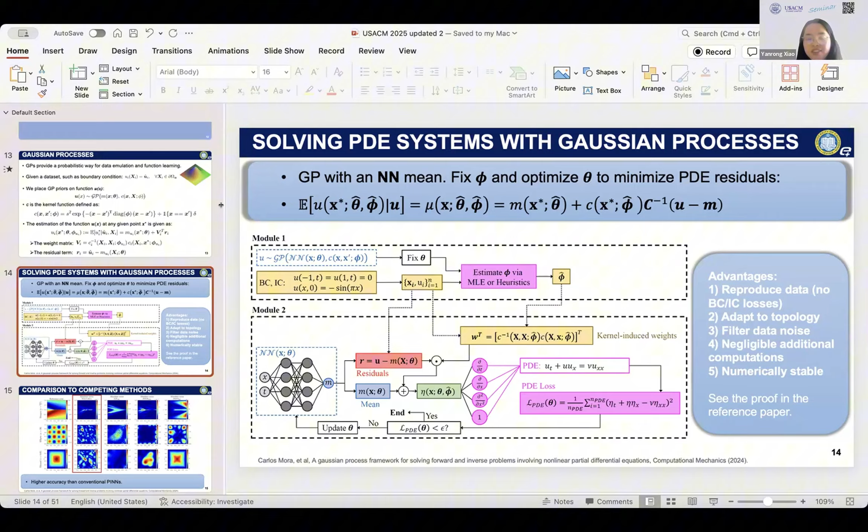What motivated you to apply the machine learning approach to this field? Well, the short answer is machine learning research is a hot topic. And topology optimization is basically sitting at the intersection between computational mechanics and structural design. Machine learning provides a powerful tool for optimization. That's why I want to focus on machine learning based TO, to see if we can improve the performance of the optimization, and also provide a better way for more advanced topics such as multi-material and multi-physics, or maybe in the future, nonlinear material response into the TO problem.

I think we are witnessing different breakthroughs by those AI for science approaches, with so many coming out these days.

From my previous knowledge, I know that you were doing experimental mechanics during your PhD studies, and then you switched to modeling or simulations during your postdoctoral studies. How do you feel about the shift during this process?